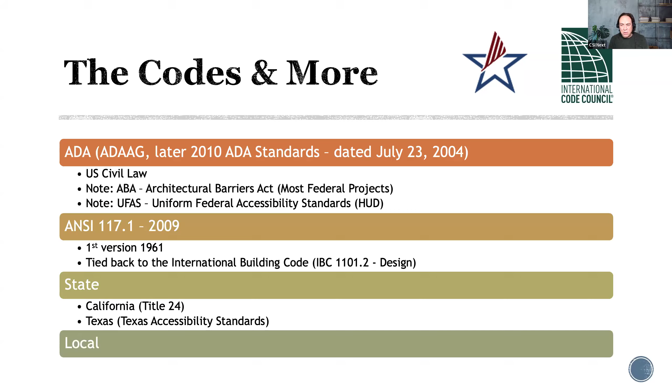ANSI on its own doesn't have any scoping requirements. Keep in mind it doesn't tell you how many elements must be accessible—it's giving you the technical guidelines. So 'if supplied, must comply' is always the simplest way to remember it. I love that little rhyme. When I first got my registered accessibility specialist, that was day one of the academy. ANSI is referenced in Chapter 11 of the IBC, and the IBC is where your scope is covered. ANSI is updated about every 6 years, where the IBC is every 3 years. The current ANSI is the 2017, and IBC is now up to 2018, 2021, and just released was the 2024.

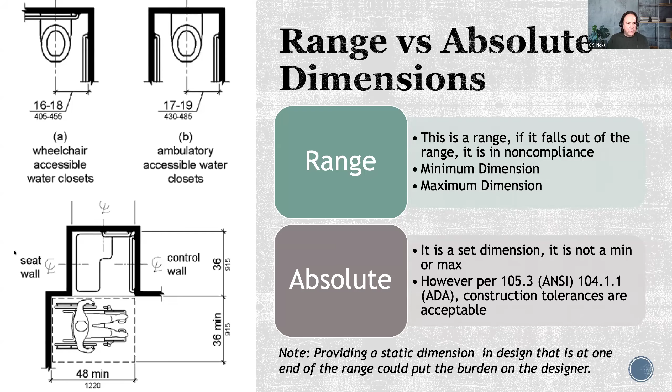ANSI's larger or new '17' sizes will not apply to existing buildings or facilities. So with this 2017 ANSI, think of it this way: go back to the 2009—it states that existing buildings use those original dimensions, while all new construction will need the new '17' with the larger sizes. An existing building is one erected prior to the date of adoption of the standard. So if your building was built prior to 2017, or the official adoption date of your jurisdiction, then it counts as an existing building.

Building blocks—these are the pieces and parts we use as the basis for space planning, the size of something. You can see here, unlike the typical illustration, the clear floor space is 30 inches by 48 inches, and you can see the detail of where that comes from. You've got your wheelchair at 26 inches wide. If you include up to the back of the wheel and the front of the toe kick, that's 42 inches, and they count a little bit larger than that.

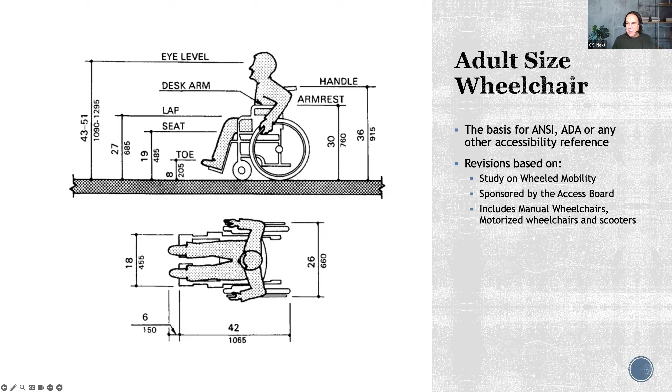The 6 inches accounts for reaching 48 total. The 26 accounts for the hands on each side of the wheel. So that's the clear static floor space, but it's nice to see all those little nuances of the dimensions.

So if we take a step back, in the ADA you've got the classic 48 by 30 inches, but ANSI is now 52 by 30, 4 inches longer. And you can see kind of what's driving that.

You have a traditional wheelchair, 30 by 45. A powered wheelchair is actually a little narrower because you don't have the elbows or hands on the wheel, but the length, the motorized part, is now up to 51. And then the scooter is even narrower yet again. The smallest scooter is 20 by 37. The largest scooter in the industry right now is 30 by 54.

So the idea is creating a standard. Do you do the worst case or somewhere in between? ANSI under 305 has set the new clear floor space at 52 inches long. You can see none of these sizes were greater than that 30-inch, so they left that. So it's a combination of the worst case between the scooter and the manual wheelchair.

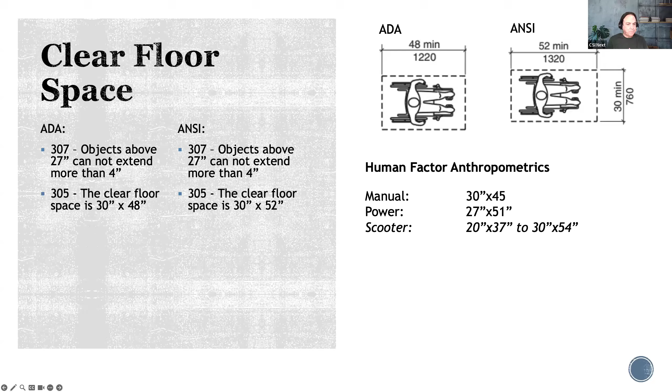Here's the biggest impact for everyone: the classic 60-inch diameter circle. I think we, as designers, contractors, owners, everyone's very familiar with it, creating that turnaround spot. You get yourself into a space with a wheelchair, to get yourself turned around. There's lots of studies done on this, that it can easily turn around in that 60-inch circle. However, scooters need a little bit more space. And both the classic T still works out to about 60-inch by 60-inch.

The benefit of the T, you can see, it's almost like a 3-point turn with a car. That's what the T has done.

So with a scooter, they have a little larger requirement. You can see there the 60 by 68. And then you also don't have quite the clean corners anymore with the way those scooters turn. That overall circle is 67 inches. One of the differences too, while it's a larger clear floor space for the circle, you can see there's less knee and toe clearance because the human body is almost completely encapsulated in that scooter. And then they identify, so basically what they're saying with that toe space is you could have some overlap with like a toilet partition.

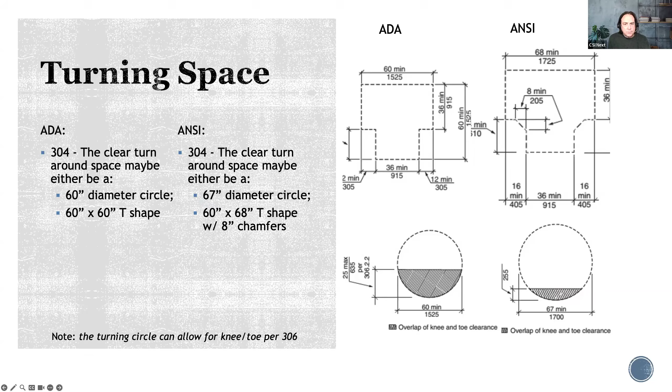Not much of a change in the reach range. They've still kept that the same regardless of the device you're on. That range is between 15 and 48. The operable parts of anything, could be a paper towel dispenser, doorknobs, whatever it is, has to fall between that 15 and 48 inches.

Think of it also as a plug. If you have a duplex plug on the floor, a floor plug does not comply. However, on the wall, if that bottom plug is above the 15 inches, that's the operable part, then you have compliance. The exception in the ADA is gas pumps.

ANSI has a lot of exceptions, and I mentioned briefly the floor receptacle. ADA is blind to it. ANSI understands that you can't raise the floor. Basically, putting a pedestal at 15 inches for a floor outlet creates a new public safety trip hazard. So those have an exemption.

If it's a receptacle for a dedicated use, maybe a copy machine or a printer, something that doesn't get moved around. They understand medical devices are not going to get moved. You can actually have different heights that may fall outside because typically it's not a general use, things aren't being plugged and unplugged.

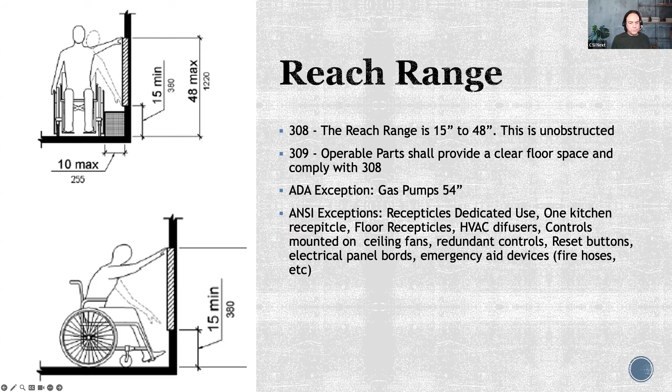Sorry about that. I should have closed my door. You heard the dogs.

The accessible route. Quite a change between ANSI and ADA. Let's kind of talk about some of those changes. So the classic ADA is 36 inches wide. That was plenty of room to even turn a corner. You could be 36 by 36. What they're discovering with these larger elements, i.e. the scooter or motorized wheelchairs, is that they adjusted.

So under the ANSI, there's 4 different options: both legs 40 by 28, or you can have an 8-inch chamfer if you're still 36 by 36. One leg at 38, the other at 42, and then one at 36 and one at 44. And then you can see also your chamfer. Another option is you could have 28 inches in each length, 4 inches wider. So basically for 28 inches each direction, you're 40 inches wide.

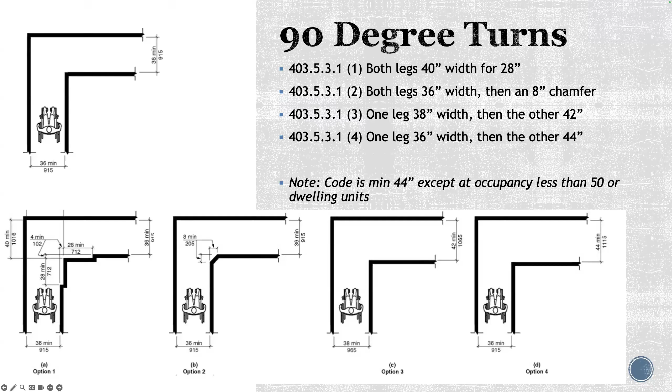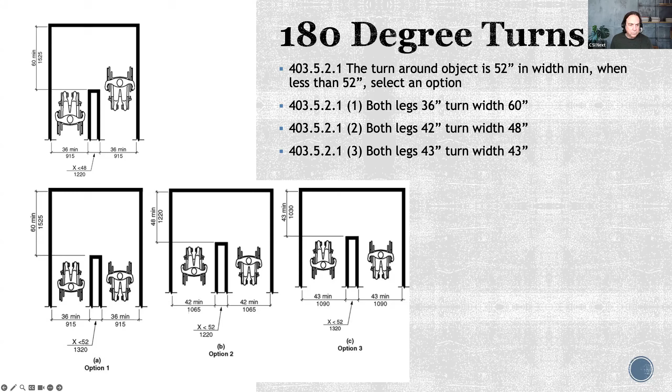When you're greater than 52, your width and your turns, you're basically getting down to that L-shaped turn when that gap between is greater than 52. Couple minor changes to doors. Everyone, I'm sure, just as you start to learn the 16 different door combinations, they're revisiting that again. This is probably the biggest change in the new ANSI, the maneuvering clearance.

They used to, in that 12-inch, you could count that as knee and toe clearance. And you could see in this example here how you could maybe have a drinking fountain in it and still be in compliance because you could maneuver with the door. That 12 inches now, you can't use that knee and toe space or anything. It has to be clear. And once again, a lot of what's driving this is the new accessible mode of transportation, the powered wheelchairs and the scooters.

They need that full clearance because they're basically, I hate to say boxy, but they go from wheels, edges, so forth in the vertical. And if you've ever seen the scooters, they've got the cool little, I want to get the banana bar on the back and the hot rod handlebars, but you do have a little bit of changes there.

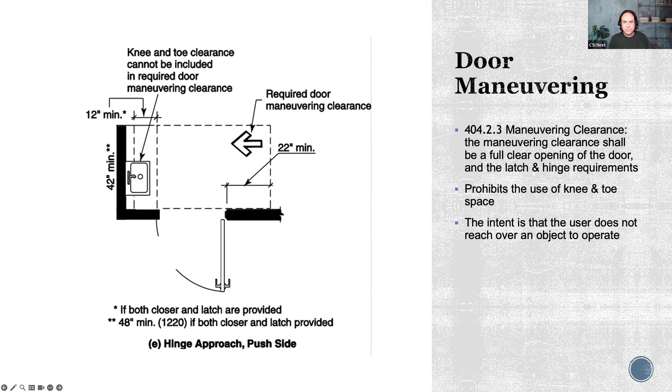And then your door maneuvering sizes on, once again, your front approach. This is probably the biggest one. I just talked about this in the last one. If both closer and latch are provided, you need that 12 inches.

On the push side, they haven't really changed that, but you'll see the change is not so much the 12 inches, but where you could get away with the 48, now you have to be 52 inches clear. So the depth has changed, but everything else about the door, and this is the only minor change in door maneuvering, is instead of 48 inches, it's 52, which falls back into that clear floor space.

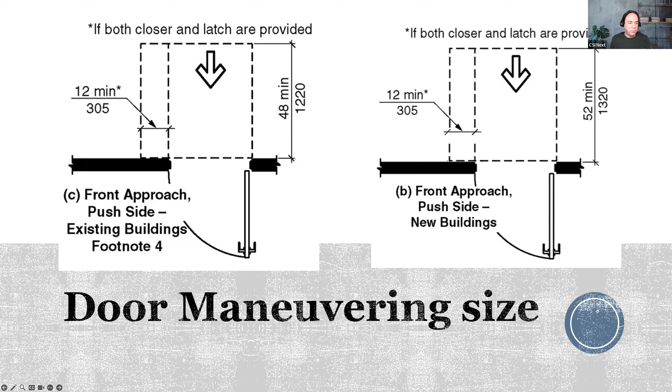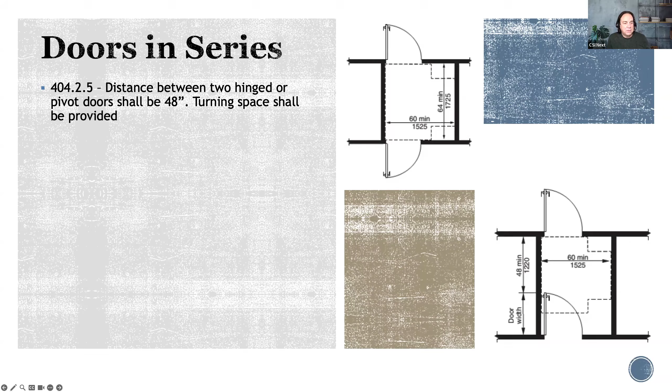Doors in series, I think they were a lot more forgiving in how they work, but you can see now the distance between the two. In the previous one, it was a little bit blind to it, and they took into account you go through one door, the door might have to close, and then you begin opening the other one. Now what they want in doors in series is that turnaround space, and you can see your absolute minimum is now that 64 by 60.

Street and parking. This is a new section, angled parking. They're actually recognizing it now, that it may be a little different than head-in parking. Once again, when you're angled, you have a different curb cut. So that old 66 or 60-inch aisle at an angle has a little different dimension to it. So now what they're requiring, if you have angled parking, you have to do the 96, which unfortunately is a little bit of a conflict.

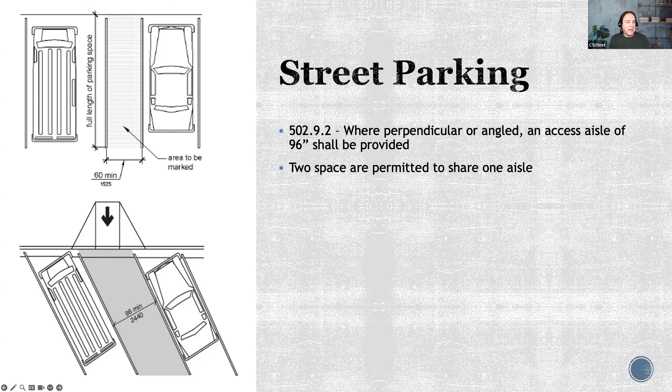In 96 inches, it feels like a parking space as your stripes wear away. So I haven't seen or heard how people are addressing that. You almost want an aisle, possibly a car bumper at the end to help resist that. It's very important, obviously, for the van to be able to extend it out or get your door when you're in a car to swing fully open. But that is one of the changes that they've done: the angled aisle is 96 inches.

Parallel street parking, this is a little different. You used to be able to lean on the curb as part of it. So now not only do you have the on-street parking space, which you normally stripe, you now have to have an additional 67 inches marked off like a parking aisle. Once again, same thing, to be able to get the car doors open and to really meet that zone to get in and out of your vehicle. Everything else still applies.

Detectable warnings required at curb ramps, blended transitions, at pedestrian street crossings. So they've expanded the detectable warning. The original ADA had a lot of misunderstanding to that. Then when the 2010 came out, they had an initial pause and then they finally decided how to address it, that it's only on a public way. And what that means is if you had a parking space and all you had was a curb ramp that just went to a parking aisle, you could have the curb ramp without the detectable warning. Some exceptions to that are under like California Title 24. They actually require that detectable warning regardless at any curb ramp.

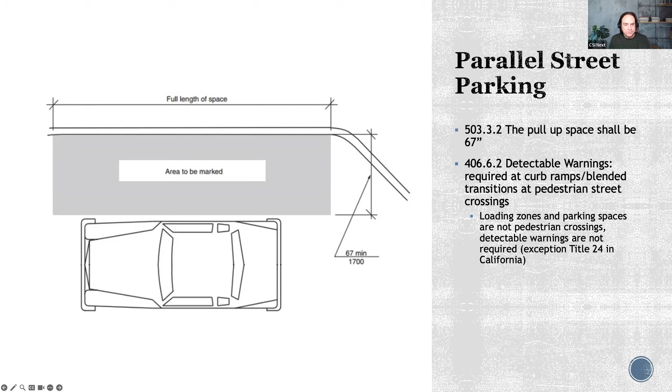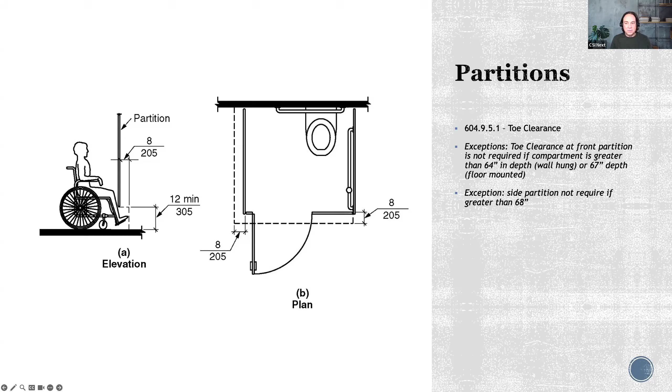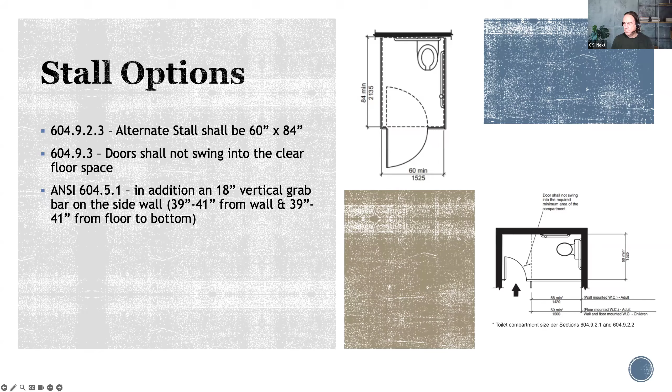Kitchen versus break rooms. The interesting piece here is the very clear definition now of a kitchenette in the ANSI. It's always been kind of implied and understood. And with that, they've taken the approach that in a kitchenette, you're allowed to have a parallel approach to the sink, where in the past I always wanted that clear knee space. So that's a benefit, since you're not washing dishes per se like you are in a regular kitchen.

Also, it's very clear that in a kitchenette, you don't need that work surface space. That's the 30-inch space where you can get the knees under the counter to cut, prep, cook, etc. And also in a kitchenette, unlike a kitchen, you don't have to have the full turnaround. The idea is you can come in and back out, whereas in a kitchen you either have to have that complete turnaround or be able to pass all the way through the kitchen from one side to the other.

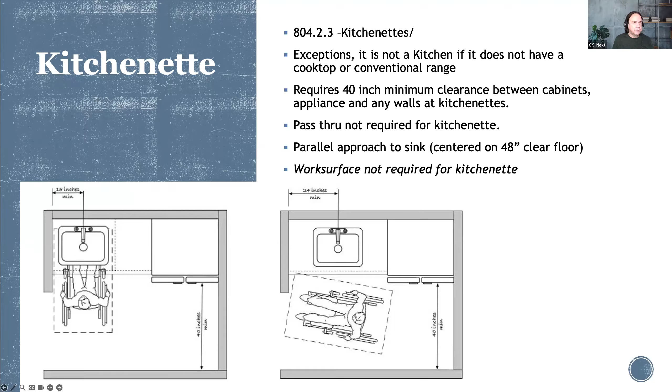We kind of touched on this earlier: operable parts, kitchen outlet exception. Once again, most of your kitchens, you have that area where if you need a plug, a great example is behind the refrigerator. You're never going to move the refrigerator. Behind the range, you're never going to move the range. So you don't have to create those within the reach ranges.

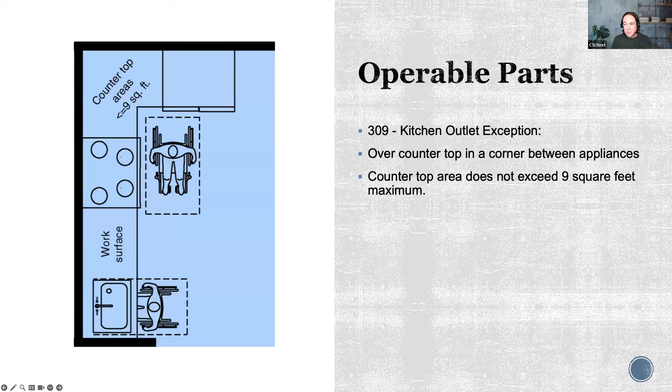At the same time, you can see when you're in the corner in this example, that countertop, as long as it's less than 9 square feet and doesn't exceed that, then you also have some exceptions to those reach ranges and clearances. So it does allow, in this example, a refrigerator, a little piece of corner cabinet, and then a range, that 9 square feet, basically 3 feet by 3 feet, doesn't have to be in all of those compliances.

Hopefully I'm not talking too fast.